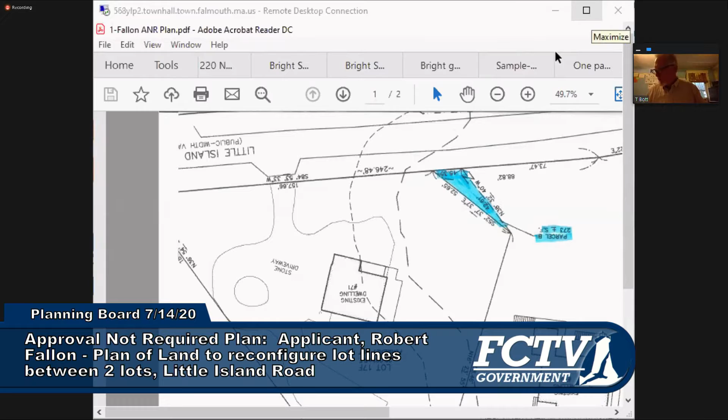Did everyone on the board have a chance to go through the materials? Thank you, Tom, for delivering them to our houses, that's really helpful. Well, we typically drop them in the mail, but this week Melinda was under the weather on that day. We usually get those things done. So that's why you got a flurry of emails rather than one nicely packaged package from Melinda, and why I menaced your yard dropping off packages for the planning board.

It took me a little while to realize that they were there, but I have them now. Okay, that's clear on the screen. Is there any question about what's being asked? No, it's pretty clear. Any board member have a comment on the issue? It meets the requirements, it's on a public way, it has the frontage.

It has everything we expect for an ANR. Yes, it does. Okay, well, I'll entertain a motion then to endorse. So move. Would you like me to read a motion?

Move to endorse Robert Fallon plan of land to reconfigure the lot lines between two existing lots located on Little Island Road, map numbers 14, 019, 017A, and 017B, without regard to zoning or buildability, and should not be construed as an approval that the lots shown are entitled to a building permit.

Is there a second? I don't think we got a second. I moved it. Yeah, it's been moved. I'll second. Okay, good, thank you. Any further discussion? All in favor? Aye. Aye. Opposed? Motion carries. Thank you.

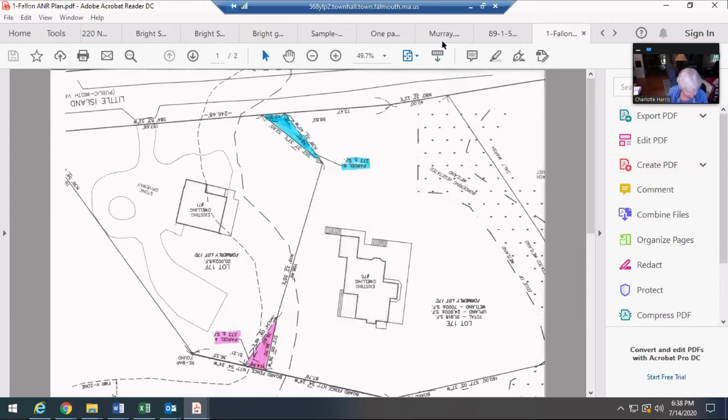Our next piece of business is much more complicated. Not really, it's just for a decision. We have a decision on it, we've seen this. The applicant is Timothy Leadham, trustee of RNG Realty Trust, for a special permit application to allow parking in the front yard located at 1209 East Falmouth Highway. Cape and Islands Engineering are the ones who presented it. I believe that we have a decision here. And Bob, could you read that?

Motion that the planning board vote to approve the application of Timothy Leadham, trustee of RNG Realty Trust under Article 22, parking requirements, and grant a special permit pursuant to section 240-109E of the zoning bylaws to construct parking in the front yard of the premises located at 1209 East Falmouth Highway, Falmouth, as shown on Assessors Map 32, Section 11, Parcel 001C, Lot 000, as depicted on the plans entitled Site Layout Plan prepared for RNG Realty Trust, East Falmouth, Massachusetts, prepared by Cape and Islands Engineering, dated January 29, 2020, with latest revisions March 6, 2020, scale of 1 inch equals 30 feet, along with the landscape plan entitled Site Plan.

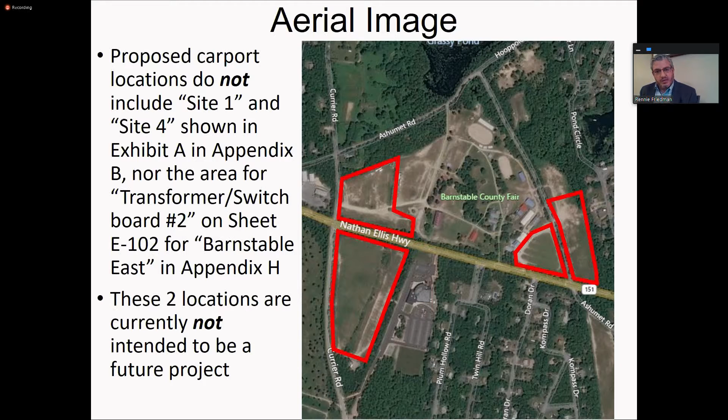I wanted to clarify a couple things the staff report brought up, one being on Ashumet Rd. Let me go back a couple slides - the area we'll focus on next is what we call Barnstable East, the two smaller red blocks on the right side of the screen. I'm going to zoom in there.

So here we are zoomed in. You can see Ashumet Rd runs north-south there. Currently there are parking lots on both the west and east side of Ashumet Rd, and you can see in blue where the existing entrances to those parking lots are.

We are proposing to keep the entrance on the west side of the road as currently shown, but the plans have the entrance on the east side shifted a little bit north to where the red driveway is shown. That was done to help the flow of traffic into and around these parking lots. We're also proposing a new crosswalk to help people safely walk from the eastern parking lot across Ashumet Rd toward one of the main entrances into the fairgrounds.

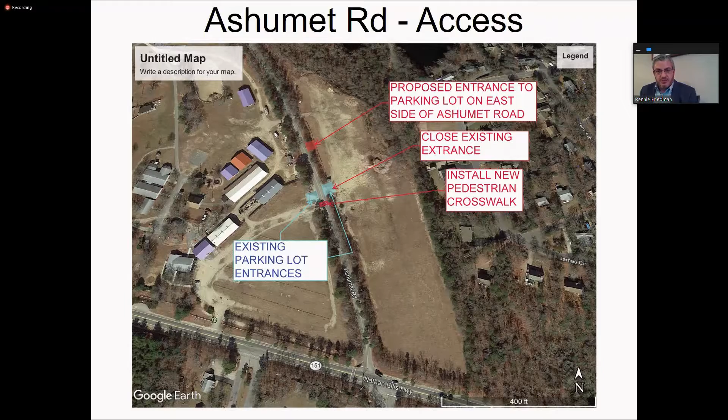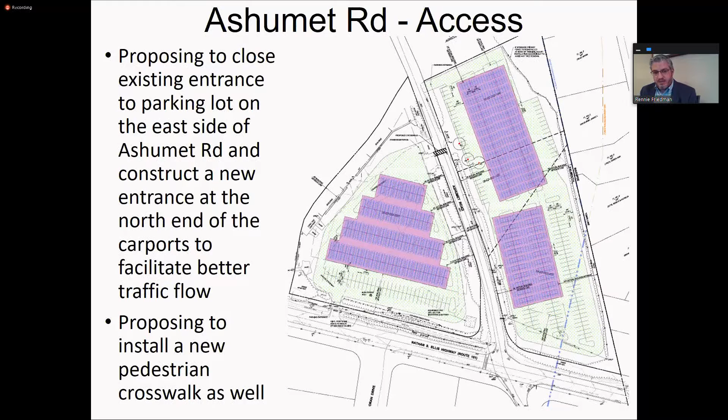One other important note that Mr. Bott brought up is the configuration of the northern canopy area on the east side of Ashumet Rd. As part of our consultation with the Massachusetts Natural Heritage Program, a state threatened and endangered item was identified, the Agassiz clam shrimp. There were three locations identified just east of Ashumet Rd, highlighted on this exhibit in the cloud. You can see the three locations are the three little red dots, each with a circle drawn around it - it might almost look like a tree with the red dot being the center.

The red dots are the locations where those clam shrimp were found. Through extensive work in coordination with the Massachusetts Natural Heritage Program, we've reached an agreement where as long as we do not place panels over the circles there, with about a 15-foot setback all the way around, we are good, and we have confirmed that with them. Given this area is currently a parking lot and will continue to function as one, they are fine with cars driving over these areas, but they didn't want any permanent or semi-permanent cover over them that would affect the amount of natural rainwater and sunlight these puddles might get.

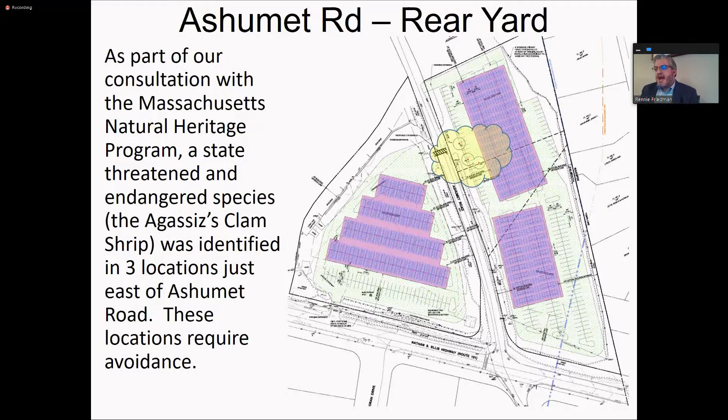Having to avoid those three areas required us to push that array slightly east. As Mr. Bott referred to earlier, the required setback from Ashumet Rd is 35 feet, but in this area we have a 78-foot setback off of Ashumet Rd, solely to avoid these clam shrimp. What that's done is on the east side of the array, it moves the edge of the panels to, at the nearest point, 75 feet from the adjacent property line. You probably can't read the 78 and the 75 foot, but those are the dimensions highlighted in the clouds here.

This is only applicable to the northern part of this array. You can see it's kind of broken up into two parts. The southern part meets all of the setbacks, but again, it's only applicable to the northern part, and even on that, only part of it. As you move further north, the property line gets further away from the panels, and by the time you reach the very north end of the array, it is fully 100 feet away from the panels.

A couple of other points about this particular area. When we're talking about the 75-foot setback, that is to the cantilevered panels, just the edge of the panels. The foundations and supporting I-beams that run vertical to hold the canopy up are 100 feet away from the property line. It's a little tough to see on this exhibit—there are little pink circles that denote where the foundations are. If you have hard copies of the plans, they should be in color, which might make it a bit easier to see. But again, for this area, it's just the cantilever panels, not the foundations.

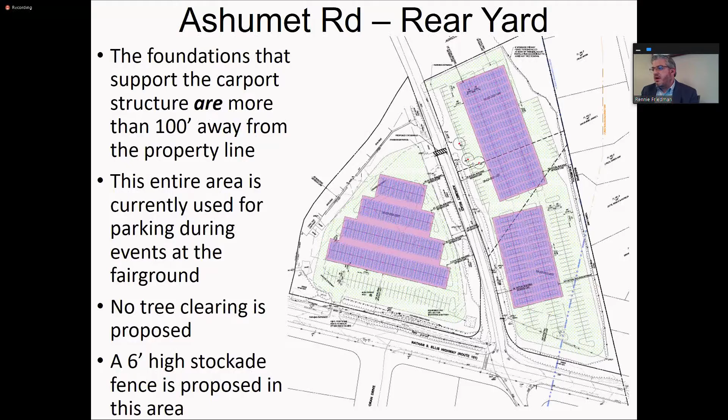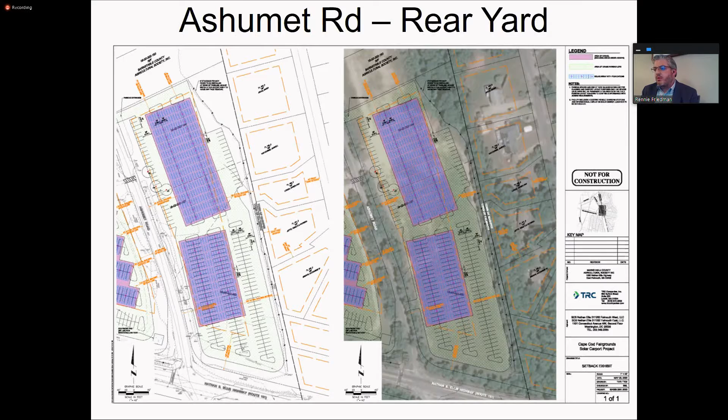So those were just some general project overview. I wanted to clarify a couple things in the staff report. As Mr. Bott had mentioned previously, there's one other setback that probably warrants further conversation. Apologies, I didn't have time to adequately wrap that into the presentation, but I do want to talk about that real quick. It might be a little hard to orient everybody, but I'll do my best. I'm going to call an audible here.

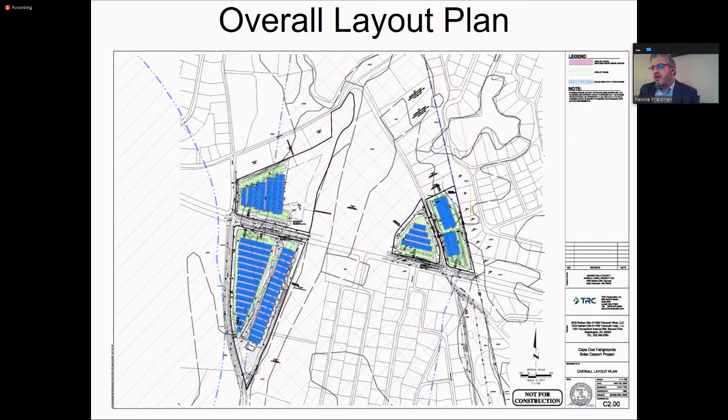We've reached out to the church to see if they'd be in support of a reduced setback here. They said they would be. We can certainly get that more formalized. The fairgrounds and the church have a very good relationship over the years. The fairgrounds even granted an easement to the church so they can use this area for some overflow parking.

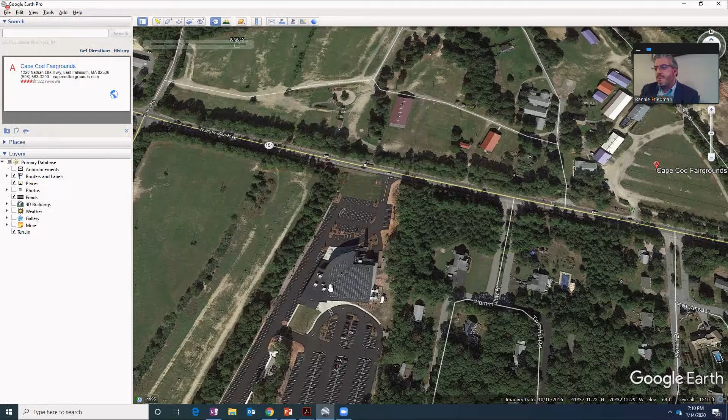So that was the one area that Mr. Bott mentioned that I didn't have time to incorporate into the presentation, but I did want to make sure I got a chance to bring it up. With that, that's really the presentation that I had. Again, Max Lamson with TRC, our engineer on this project, is here with me as well, and we're happy to answer any questions the board may have.

We may be asking you to go back to the shared screen with these questions. So it's time for the board to ask their questions. Pam? Yes, I'm concerned about whether there will be any glare that could affect any of the residents from the solar array.

No, there won't be. There's enough existing tree line. Let me share my screen because I have Google Earth pulled up, and it really paints a nice picture. So the existing residences are really only right along this eastern property line. This was the one I talked about further, where the clam shrimp are. If I zoom in here, you can see there's a pretty dense existing tree line. Again, it's really only these couple homes that are even anywhere close. Once you get further south, they get further back and there's even more trees.

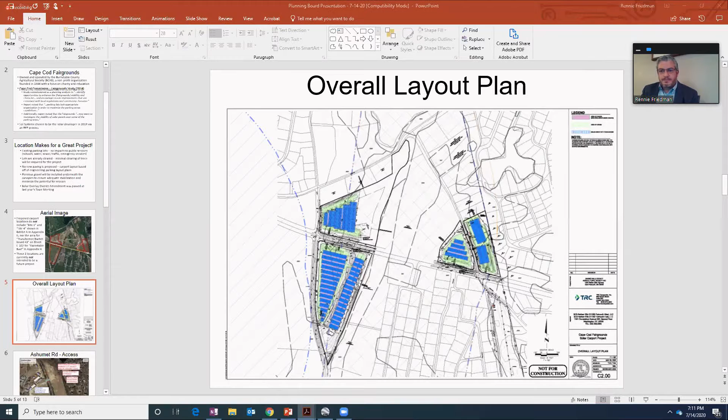The other thing you can see in the, let me pull up the site plan, this shows it a little bit better. In this area, all of the panels face south. So all of the panels face south, meaning the panels do not face the homes either, so they will not see any glare. Great, thank you.

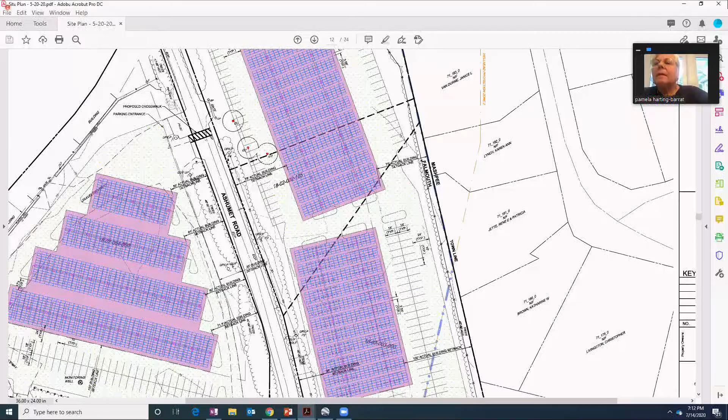Other questions? Paul? Mr. Friedman, thank you for your presentation. I'm very much in favor of this project, and I also like the small elements, like the educational aspect of it. I thought that was very, very well done. But I have three minor questions, and I thought I'd ask you if you could comment on them, please.

Sure. You say there's no increase in parking, will there be a decrease in parking with these structures? We don't believe so. I phrase my answer like that because there's no set parking lines out there, so it's difficult to calculate how many cars could fit there now. What I will say is that when you do carport applications where there's a defined parking lot, like at Kenny's, you generally don't lose parking spaces. You're able to incorporate it into the existing parking footprint without losing spaces. That was one of the reasons we spent so much time doing detailed engineering plans for the parking lot itself. We wanted to make sure we weren't just trying to cram in as much solar as we could in a way that wouldn't function as usable parking. So I do not believe there will be any change in the parking.

Thank you. One other second question: you mentioned the accessory structures are going to be located within each parcel at a distance from houses to eliminate noise. What kind of noise are you anticipating from some of the accessory structures?

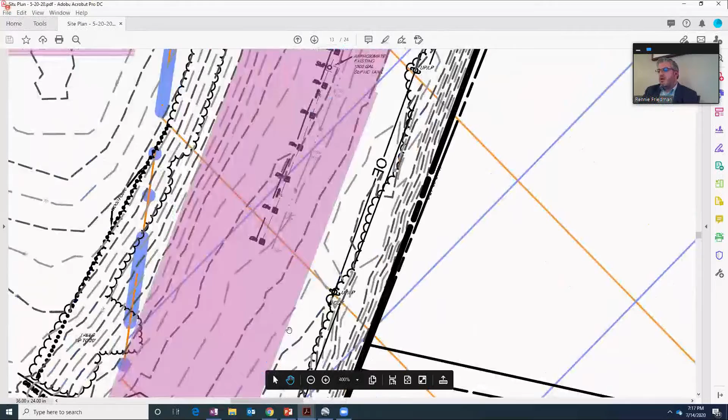Going on the south side of the highway, you can see that these are where the facilities are going here. So it's all along this kind of eastern buffer area, and here it does expand. Some of the minor earthwork we have to do does expand back, but the areas themselves are all outside of the parking areas. So if you zoom in, you can see that the panels stop here at the blue, the pervious gravel is the pink, and then this is the shallow detention area. So here on this part of the project, all of the stormwater drains generally this way from west to east. So of course you want to put your ponds at the low point so that the water can collect there.

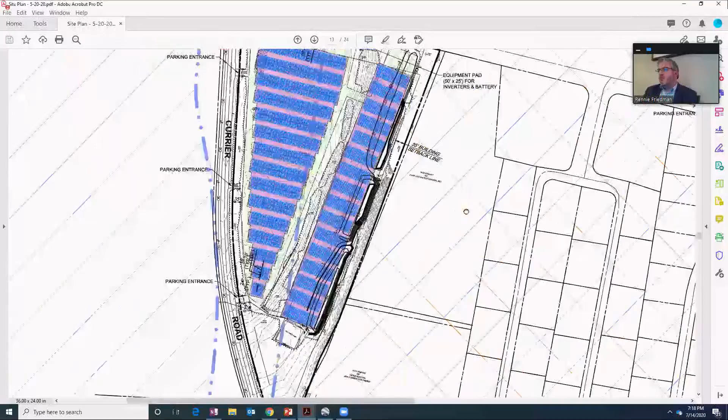And then I'll zoom over here to the east side of the project. Here it's a bit smaller, but if I zoom in, you can see that there's two. There's one right here in the corner, and then another one on the other side of Ashumet Road in the corner as well. So outside of the parking areas, there are cases where it might be in a drive aisle, but again, not in a parking space.

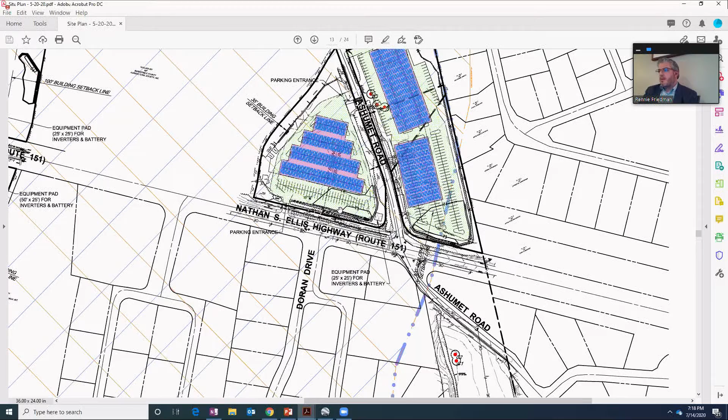Currently, how is the lot lighted? Is it with the light towers? So there are existing kind of wooden poles with lights out there.

And I read in the packet that we got that there will be lighting underneath the solar canopies. So does that replace the light towers, or will it be in addition to the light towers? That's a great question. No, that will fully replace the light towers that are out there now. And it is under canopy lighting, so those lights will be pointed and focused downward.

So the light's not going to be going into the neighbor's property, and they'll be able to be controlled from the office of the fairgrounds. So they're only going to turn them on when they need to, when there's cars there, when there's parking there, which will have the added benefit of not needing to be on all the time. But also when there are cars there, it'll be a very well lit and safe parking. When I saw that, I thought it was a nice improvement. Oh, thank you.

And the other question I have is there were some engineering things that I think are fairly minor. Have they been addressed? Some of it is addressed to us about changing the name. The Department of Public Works Engineering should be replaced with Planning Board. So there's just little things like that, and then the soil erosion and sediment control standard conditions, about waiving them. Has that been discussed with either the town planner or with the engineering department?

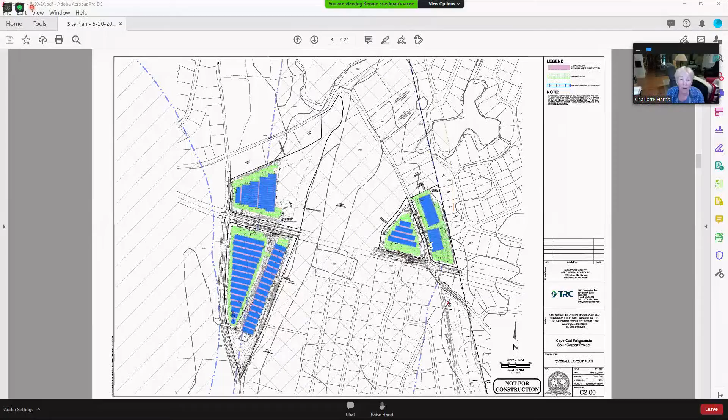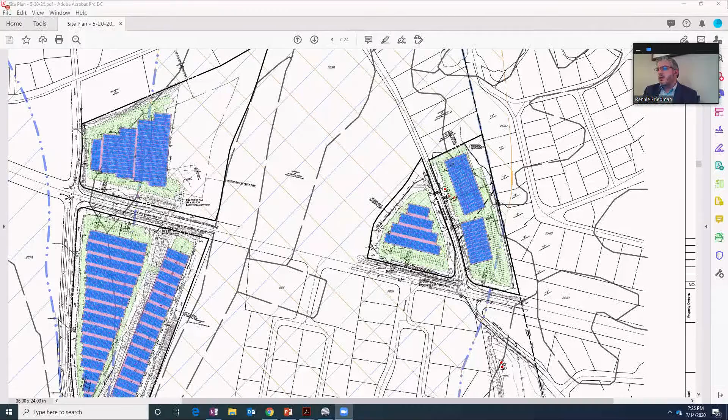Okay, I have a couple of questions. One, I wonder if you could go back to the site plan that shows the westerly site. I can't see, are you using the same entrances that they've used all along for those parking areas? When you say westerly site, do you mean west off of Ashumet Road, or the whole other side of the project? The whole other side, both the north and south sides of the western part of your project.

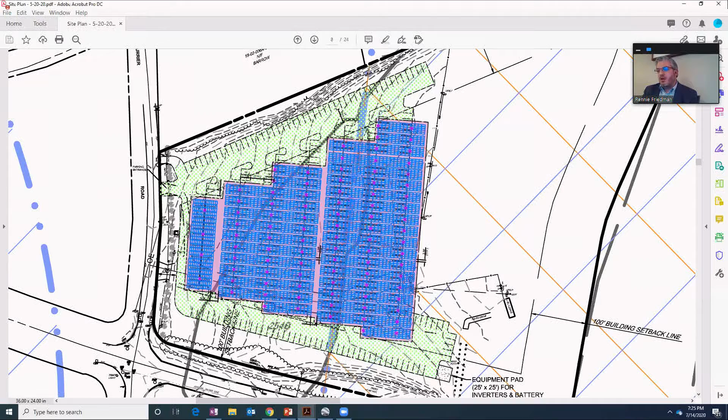Yes, for this area we will be using the existing entrances into the parking facilities for both the northwest area here and the southwest area as well. You can see there's an entrance here off of Courier and an entrance here as well, and those are existing entrances.

And they're existing. The other thing I was reading, they're going to be 19 and a few inches up to about 23 feet off the ground, pretty high. I wonder, I'm familiar with what solar carports look like because of the ones on Thomas Landers Road for the ice skating rink, but I wonder what will these look like? There seem to be a lot of different ways that solar arrays can look.

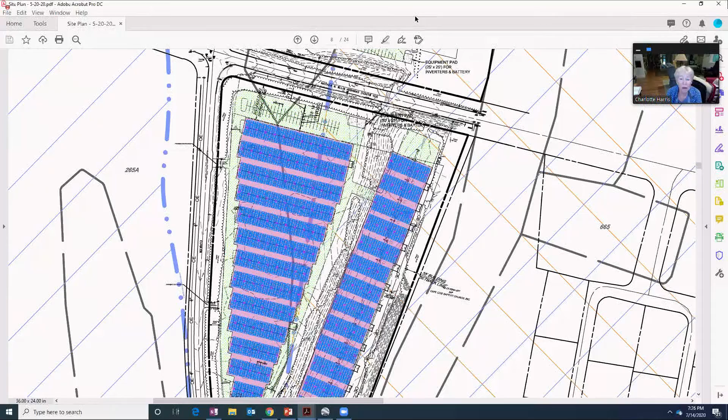That's a great question. So we have a pretty unique solution here. I don't have this in the presentation, but it is in the site plan, so let me scroll through here. Let's see, oh I got to share my screen again. There we go. So I'm looking at the plan we submitted, sheet C6.01, and this sheet does have some details and some cross sections for what our particular carports are going to look like.

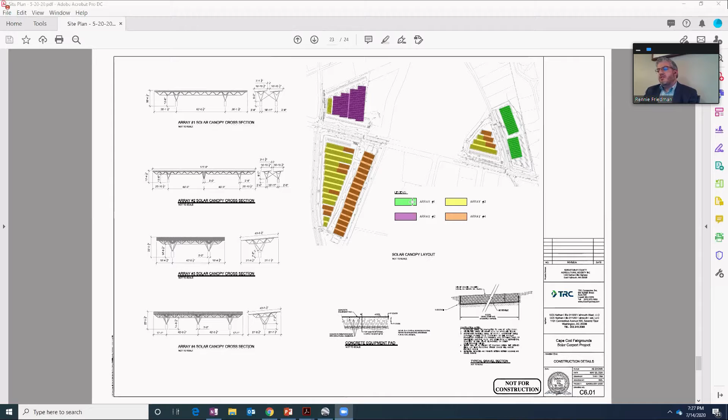There's a couple different types of arrays, different spacing of the columns, different orientation, a couple different types that we're going with. But if I zoom in here, we can start to get a sense of what these might look like. They're a little bit different than your typical ones. I think typically you would see a foundation and just one single support coming up, and then just a single I-beam underneath. This is more of a framework type system, more of a truss that will support the solar panels that go on top.

What we really like about this option is it can be quicker to install. Basically, you're able to assemble it all on the ground, and then with a single crane pick, you pick a whole array up and set it in place. That gives us a lot of nice advantages, because we're going to need to take up some parking spaces when we're putting these systems in, but we want to make sure we're not taking up parking that the fairgrounds need. So by using this system, it allows us some more flexibility and allows us to install it a little bit faster, so we can make sure that the parking spaces are back in use.

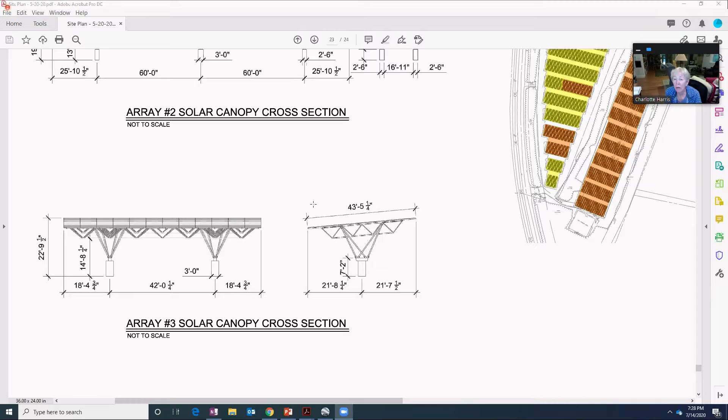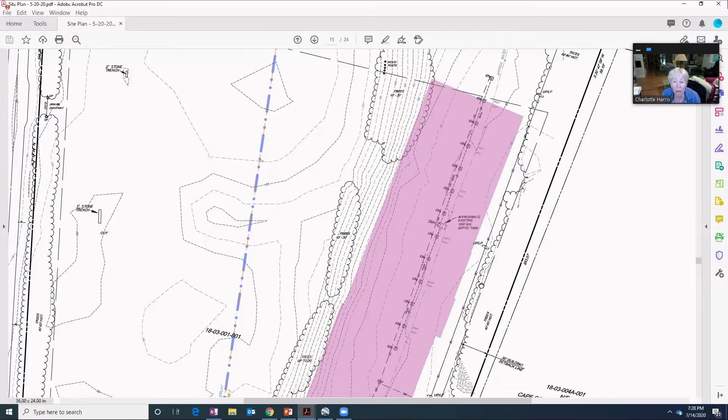Okay, on the part I think you're calling the RV parking section. At least on the plans that I have, I couldn't quite make out—the others you could see where you had planned to have the parking spaces, although they won't be marked on the ground, you were showing that they met the requirement for 10 by 18 feet. On the RV one, there's quite a slope to that land, so how does that work? People would be parking downhill, and the solar panels above them, 20 feet or so above them, are going to be sloped also?

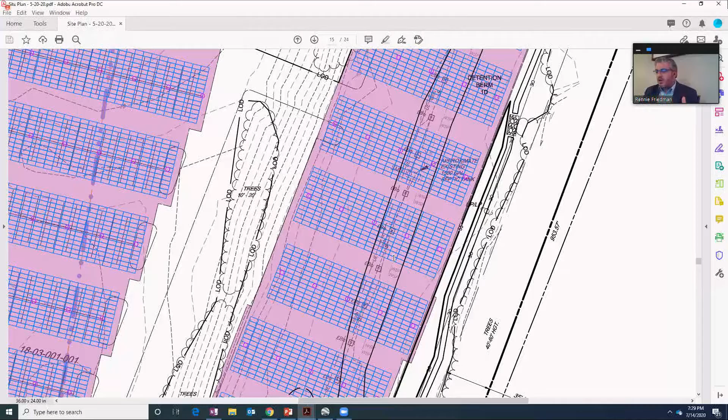Correct, yeah. And so what I've done here on the screen is I've zoomed in to this RV lot. We took special care with this lot, we took care with the whole project of course, but special care with this lot because there's existing underground water lines, electric, some sanitary sewer lines here, because it is an RV lot where you can come and hook up your RV, your camper, and have water, electric, and sewer hookup. So we wanted to make sure we could keep all those systems in place so that we're not driving a foundation through a line or hitting a line. So we did a detailed field survey to locate where those items are, and you're exactly correct that we designed these systems so that they would slope with that land there.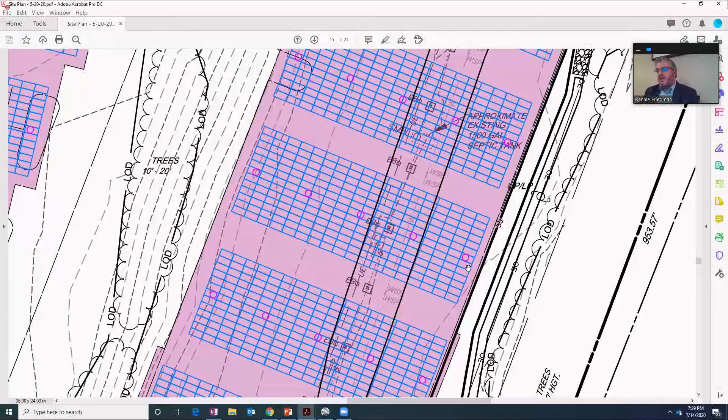And the RVs can still park there as they currently do. So the rainwater will be draining off them in two directions, flowing diagonally down across each set of panels. And it looks as if it might, rather than going down to the pervious gravel, go off the gravel into the grass and trees. Is that what you're thinking?

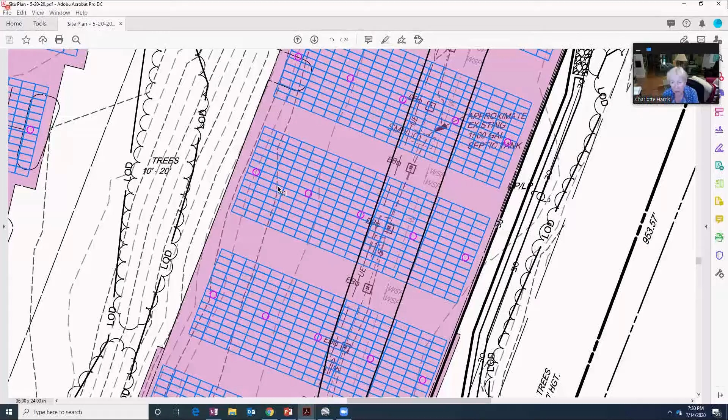Kind of. So what's nice about this carport system, and I don't know if this comes through in the detail sheet, I'll zoom in to check. It probably doesn't, but I'll try. So these are not panels butted together on top - there's about an inch gap around all the panels. So when it rains, the water will not concentrate on the edge of a panel or a series of panels and waterfall off, like you might see if the gutter was clogged on your roof - all the water sheets off and waterfalls over. Because there's a small gap around each individual panel, the water will be able to almost keep its natural path on the ground.

Each panel is about 3 feet by 6 feet. So if you imagine thousands of these panels, each one has a small gap all the way around it on all four sides, so that the water will still be able to get through to the ground as it's currently doing.

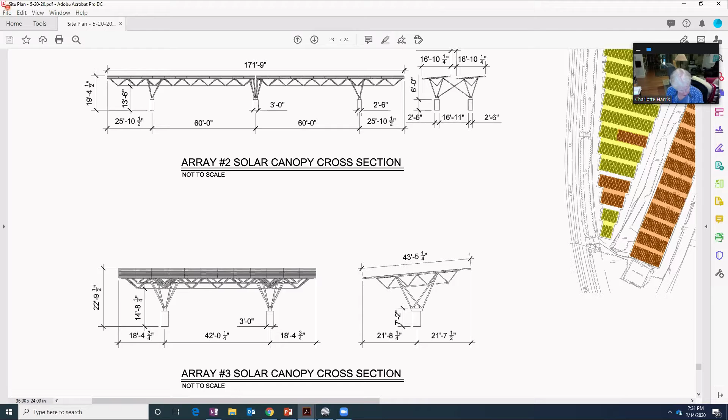Okay, and I suppose the engineers looked at that, and the soil erosion people will also. I had a general question - it seems as if the operator, the people doing the maintenance and looking after this once it's up, Sol Systems is designing it and putting it in, but then the operator is going to be the Barnstable County Agricultural Society.

Is that right? No, actually Sol Systems will operate and maintain the solar carports. The Agricultural Society will still operate the fairgrounds and the parking lots, but as far as maintenance and operation of the solar system itself, that will be on us.

Okay, those were my only questions. Are there any other questions now? Pam?

Oh, you have to unmute yourself. There. Rennie, what is the life cycle of these panels?

Excellent question. We have a 20-year lease, is what we're putting forth. The panels don't necessarily go bad after a certain time - they get a very small amount less efficient each year, I think about 1/4% less efficient each year. But if you think about that compounding, 1/4% of 100% is bigger than 1/4% after 10 years or so. So the panels don't truly wear out - they'll still work 10 years from now, just a little bit less than they do now.